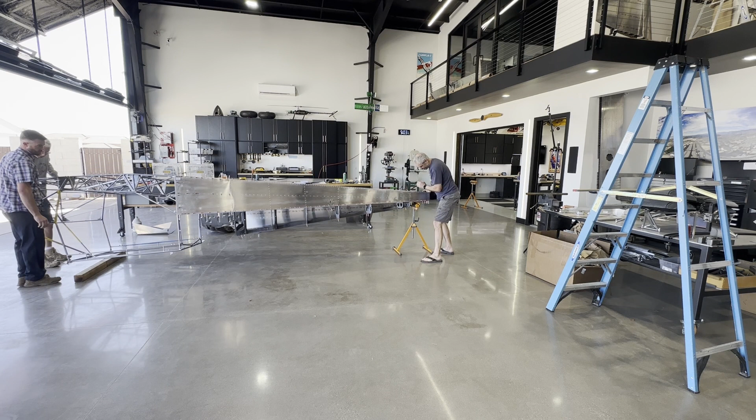I've got my bottom skin placed properly. It's centered left to right. I've drawn a mark on the underside of the skin 3/4 of an inch back from here. I've lined up those holes on those marks, so I'm set back the appropriate dimension. Like I say, it's centered.

At this point, I'm gonna go ahead and drill these holes for the tabs here. For that, I'm gonna clamp it first with some clamps, but then I'll come in here with my hole finder and get those along the front. I believe there's a tab or two - there's one right here as well, and one right here.

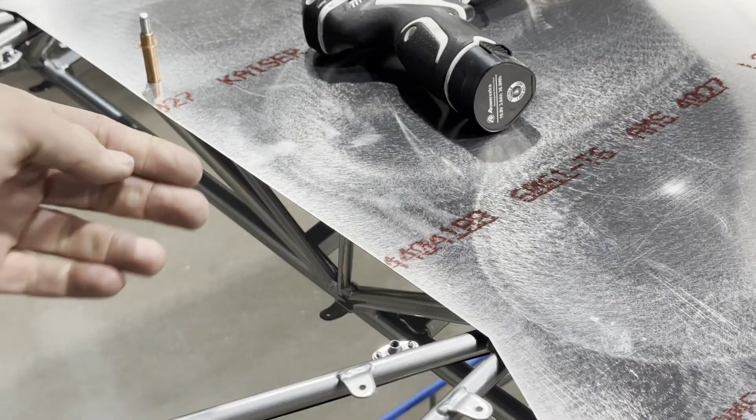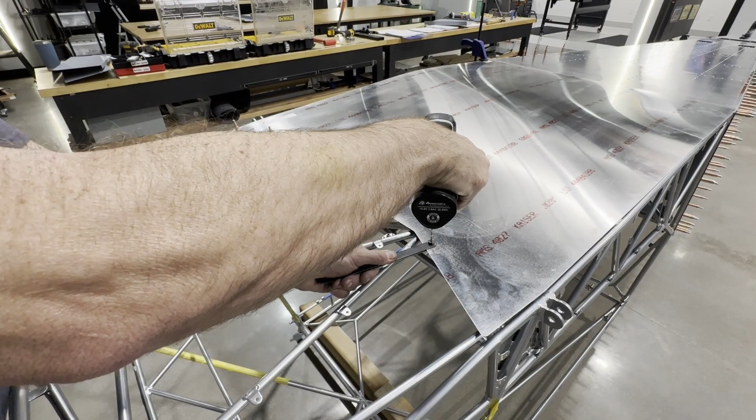Got all those on the front edge of the skin done. Now I'm gonna work my way back to the aft end. There are a couple rows here. I've got some tabs here, and some tabs here. So now for that, I will have to get up under there and match drill from the inside of the cage outward. But at least now this is locked into place, so that'll hold it, and I'll just get in there and do some drilling and work my way back.

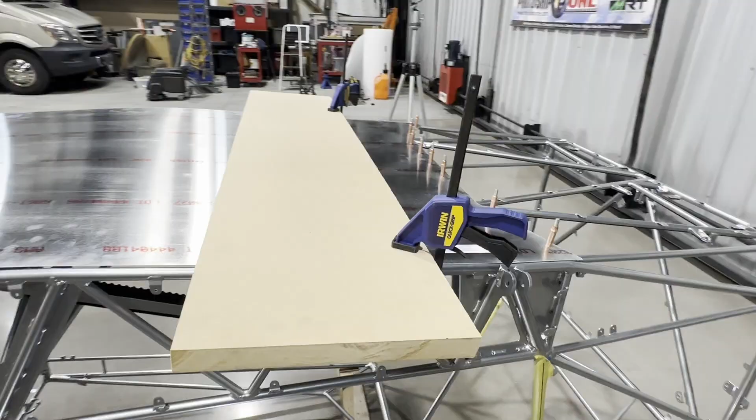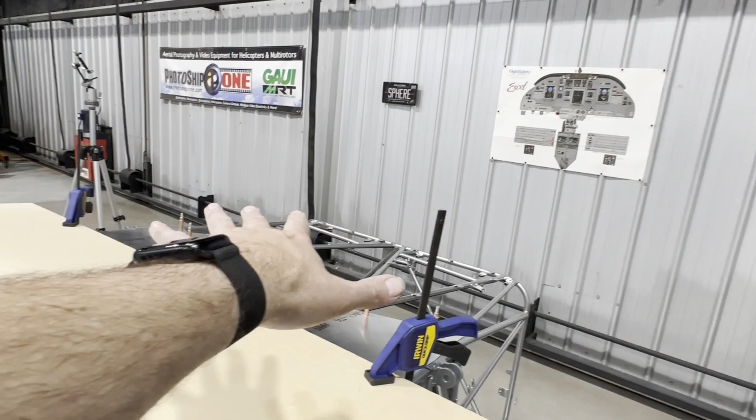As I was gonna go in there and start drilling, I realized I really need to put a backing on here, and of course, I'm by myself, so I can't reach around. So I just got a scrap of this 1-inch MDF, clamped it across here, and might put another clamp here and right there. It'll do two things - keep the skin nice and tight, and I clamped it down there, and it'll provide a backing for when I drill those holes.

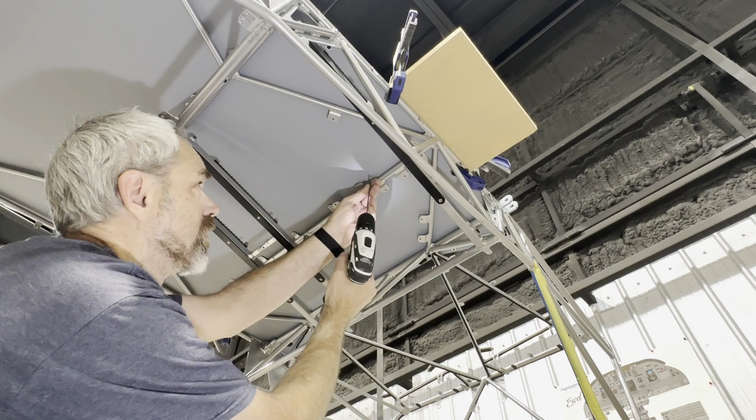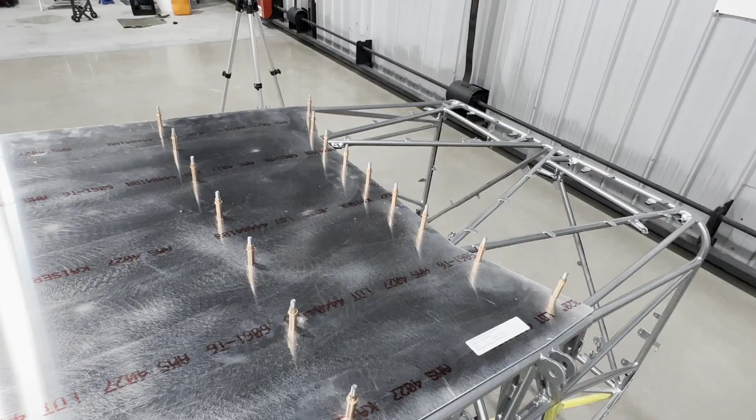That worked out great. I've got the board removed, I've clecoed, I've moved my board back to the next station that gets these tabs drilled. Got her clamped down, I'll get in there and drill that out.

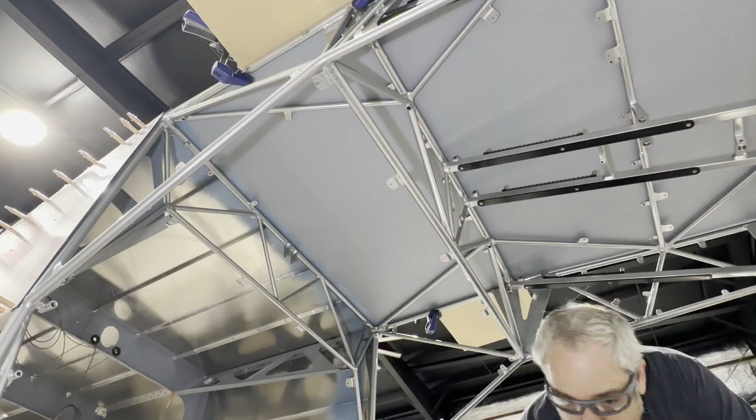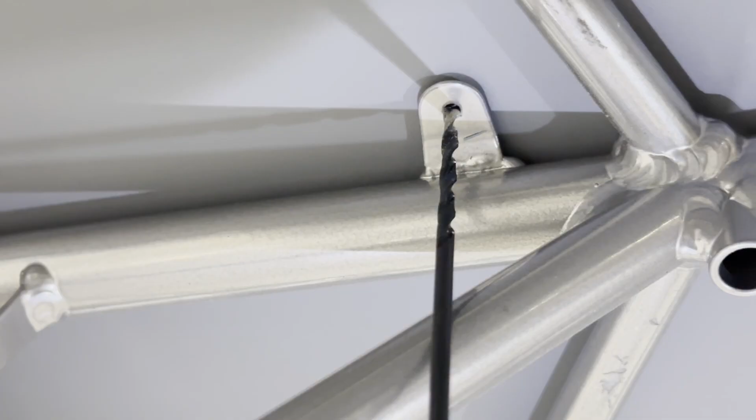Bottom skin is drilled and clecoed. Got all the tabs, worked out pretty good using that board. Working on the aft side skins at this point.

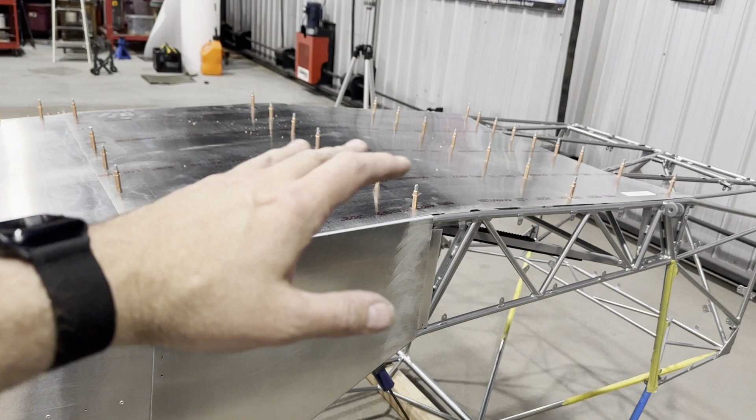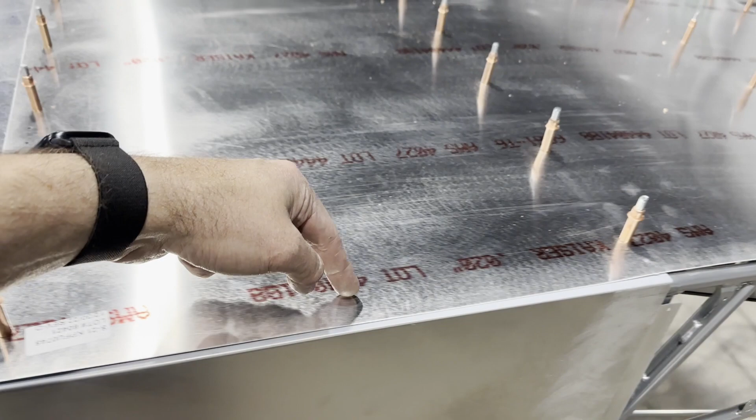The manual says once you get the belly skin drilled and clecoed to flip the fuselage over and do other things. But I thought it made sense to leave it upside down and work on these skins here, because I am gonna have to drill through here. I think it'd be easier to drill through here with this thing upside down and go through the belly skin into the side skin for the rivets that go there.

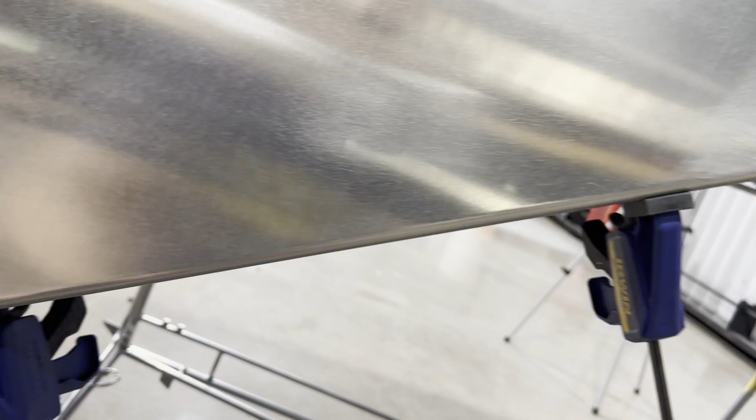So what I've done is I've got this in place. I've clamped it tight up against the tube at the front and rear so that everything is gonna be exactly where it needs to be. And I'll go in and match drill from the inside out. There's 3 tabs in there, and that's why they haven't drilled these holes here.

That's why there's gaps here. I'll match drill from the inside out these tabs, then cleco. Then I can come from out here and match drill from the outside in.

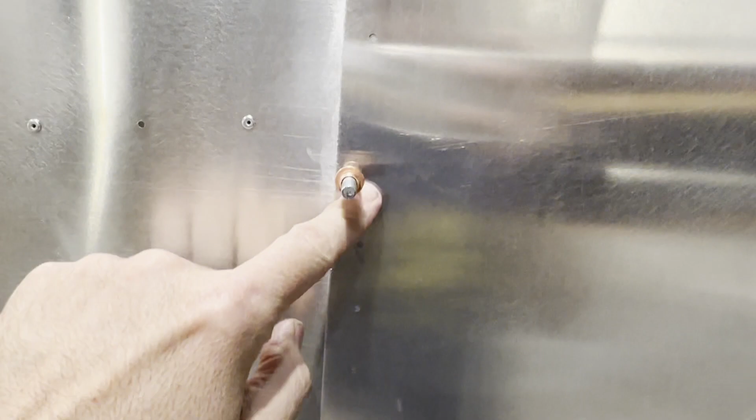Something I want to point out - I've got this skin fit here and I match drilled through, and something I noticed, the factory has pre-drilled holes, which I had showed earlier, and I was going to match drill in between those. Well, the match drilled holes are not in the same line as the pre-drilled holes. They're shifted back about 3/8 of an inch, 10 millimeters, maybe 12 millimeters.

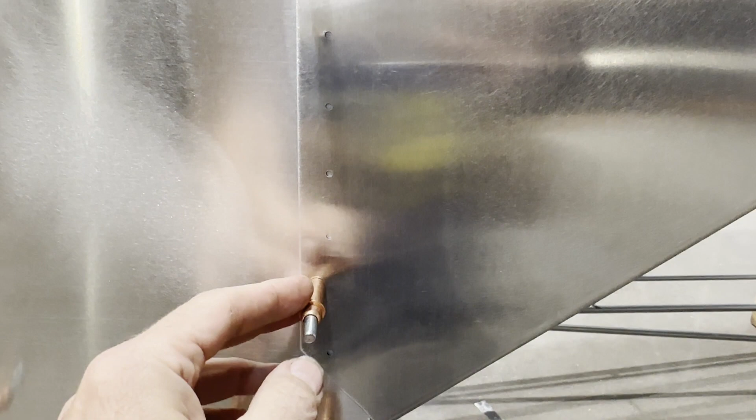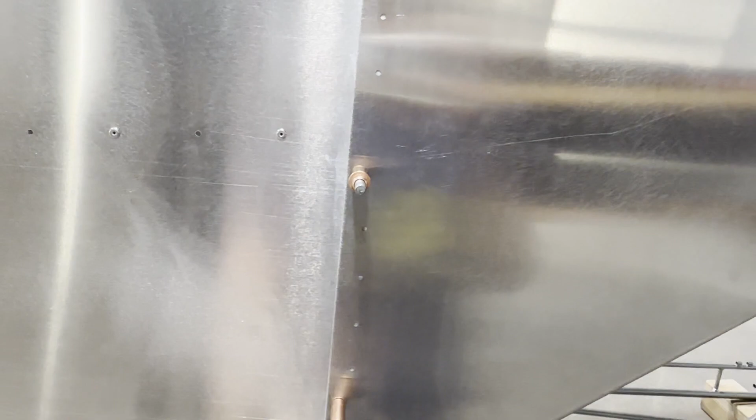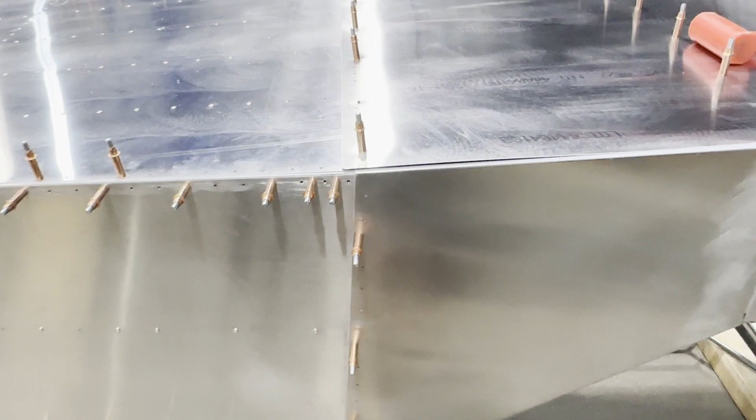At first I was concerned about that, so I reached out to the Facebook group and found that that seems to be typical. So don't be alarmed when you see that. It's unfortunate a little - I feel like a good change here for Rans would be to just move this row of holes back about 10 millimeters, and we'd have a little bit better chance of it lining up with these holes, because it's purely an aesthetic thing at this point. Structurally, there's no issue with that. It's just looks, and in the grand scheme of things, it's probably something that no one's ever going to see.

So just FYI, I did notice that, and if you ever are doing one and you get to this point, you'll probably notice the same.

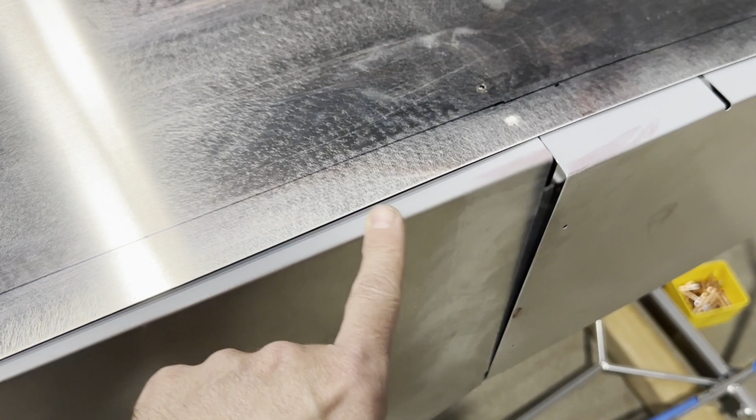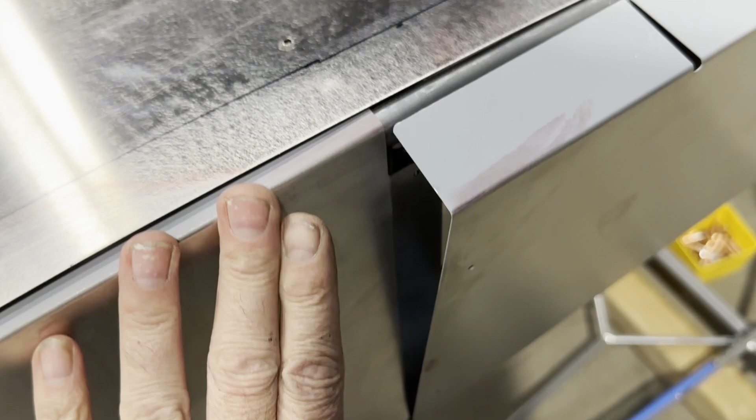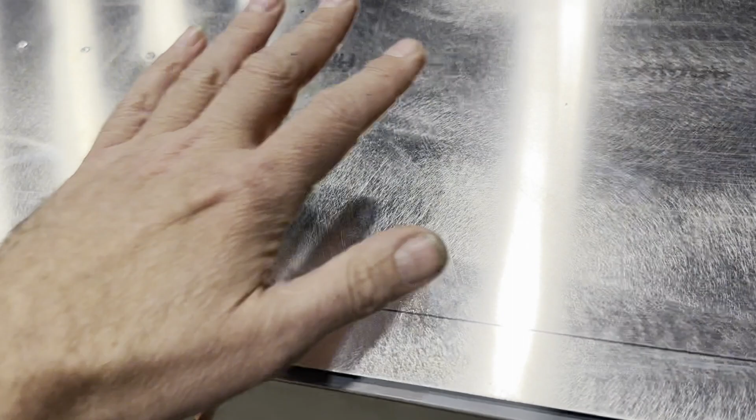Now what I'm going to do is get these holes drilled in here. They're going to go through the bottom skin and through these side skins. I've determined that these are 1.5 inches wide from the edge to the outside of this radius. I've pushed this tight up against the tube, and I've measured 1.5 inches all the way down, and struck a line. This lets me know on the outside here where this skin ends underneath, because I need to come in 3/10 of an inch. That's the edge clearance I need for the holes that are going to go here.

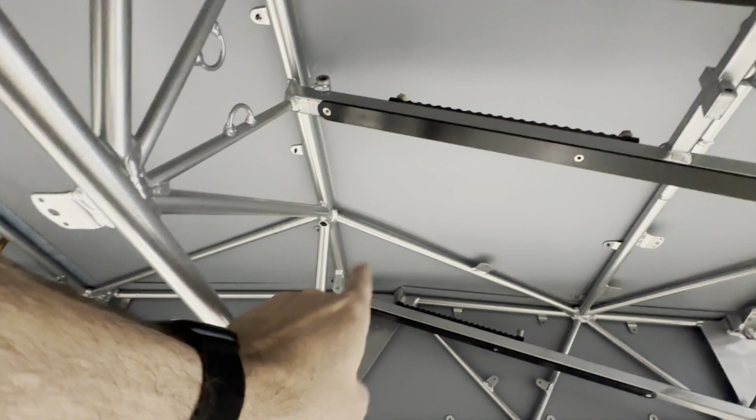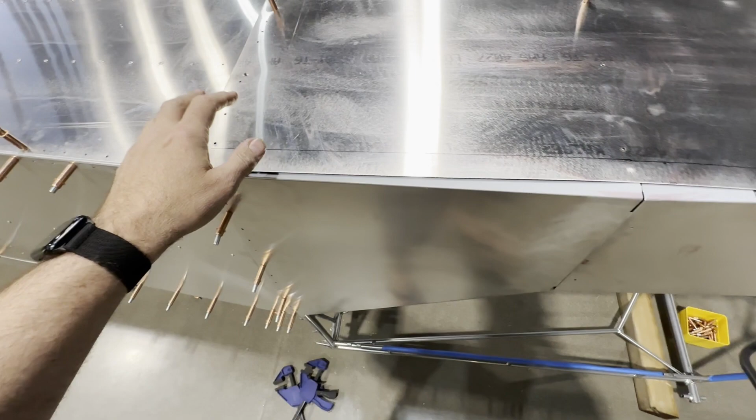And these holes are going to be on a 2-inch spacing all the way down. However, I do have some tubes in there that I need to be mindful of. As an example here, you can see where this tube connection is, that weldment with all of those connecting there, and so on. So I need to transfer where those exist on here, and then I can set my 2-inch spacing between.

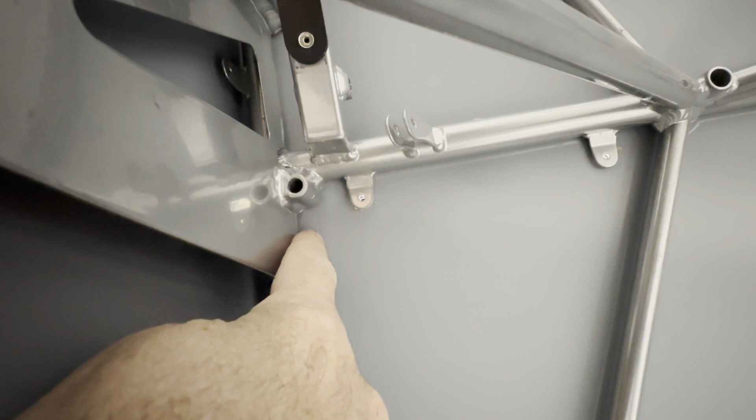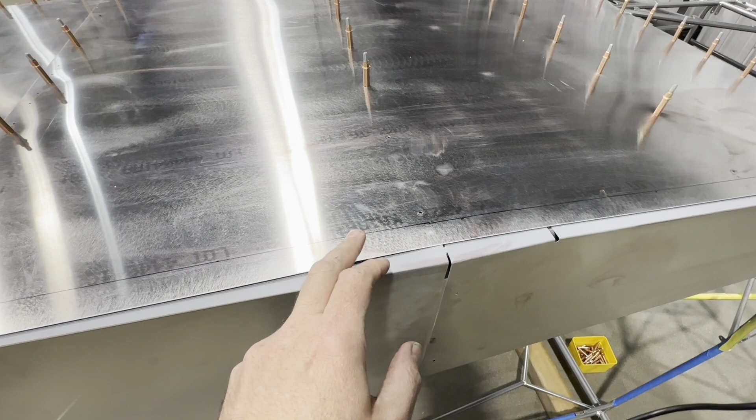I think the way I'm going to do that is come in from the inside with a long bit, and pop a hole right here where I've cleared this weldment. Then also pop a hole right here somewhere. Then I can come up here, I'll know where those two holes are, and use my rivet spacer and spread it out to give me a 2-inch spacing between those, or as close as I can get. Mark those holes, drill, and do the same thing coming up underneath here after that weldment, pop through, and so on, working my rivet spacer.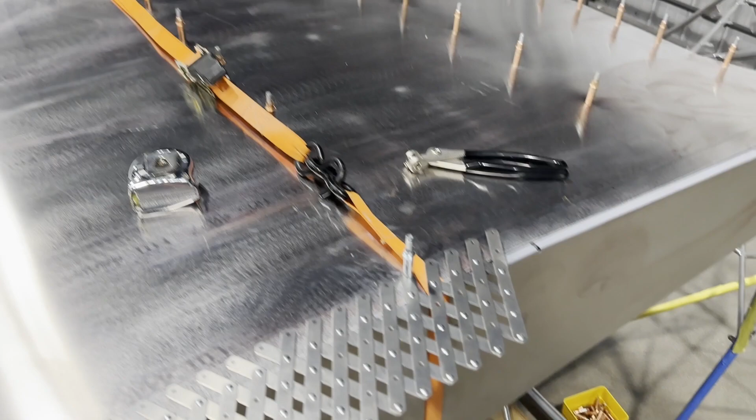That worked great. I popped that hole in from underneath. I ran a ratchet strap around it just to keep the skin tightly pulled up against the lower longeron tube, and set my rivet spacer up. If I go every other hole, it ends up being almost exactly 2 inches. So I'll go ahead and mark these holes, and just duplicate that same process for up here.

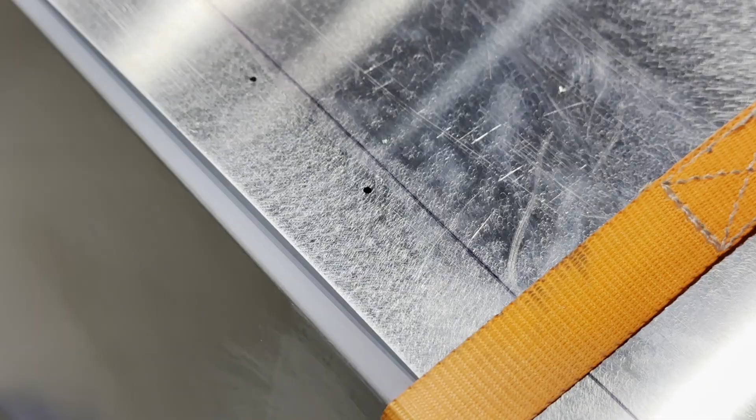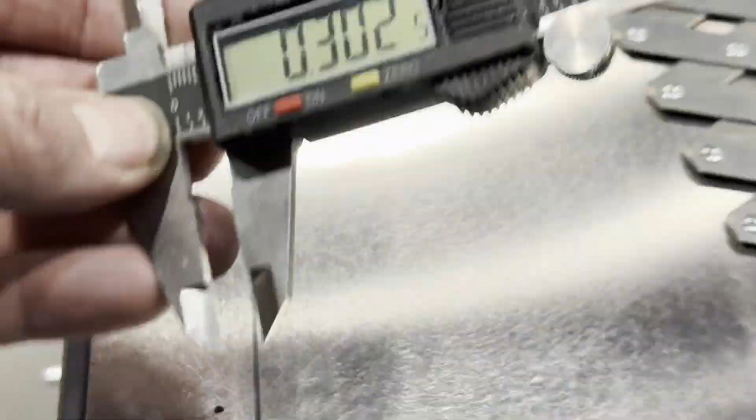And there we go, there's the holes. Perfect. And you can see I landed right on my 300 thousandths edge clearance all the way down. So good, I like it. Keep moving.

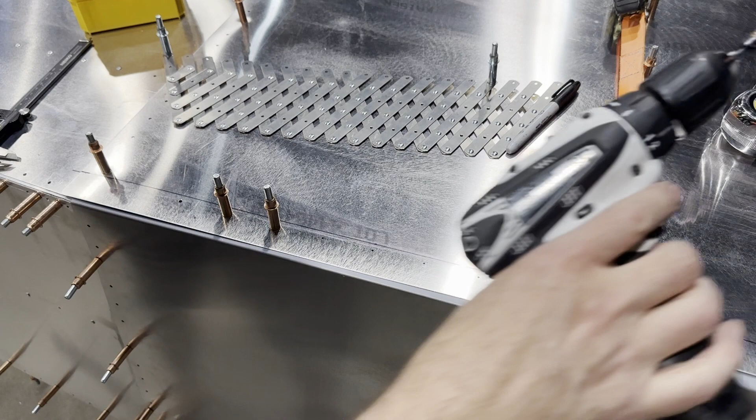I got everything marked out, and now I'm coming back in here and drilling on my marked holes. So I'm just going to give a good little push on the skin, make sure it's against the longeron nice and tightly, and I'll come in here and hit these holes.

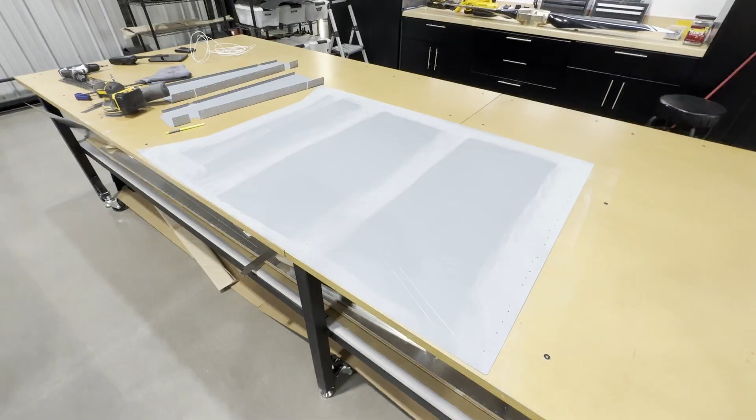Hopefully I've got the AC kicked on now. It's 97 degrees out here today, so it's heating up. My AC is kicked on, and it's pretty loud in here, but I'm wearing a microphone now, and hopefully we're not going to have too much background noise with the AC. I guess I won't know until I get into editing, but anyhow, here's the skin.

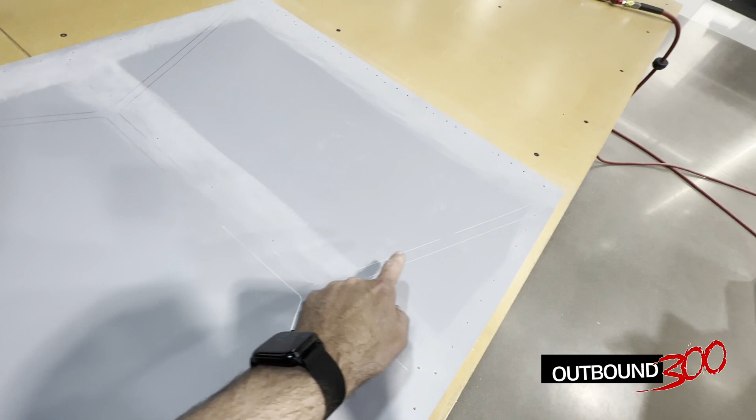I got the skin pulled off. You can see where I had marked it with a Sharpie, where the tubes were, so that I can place the stiffeners in here with some VHB tape.

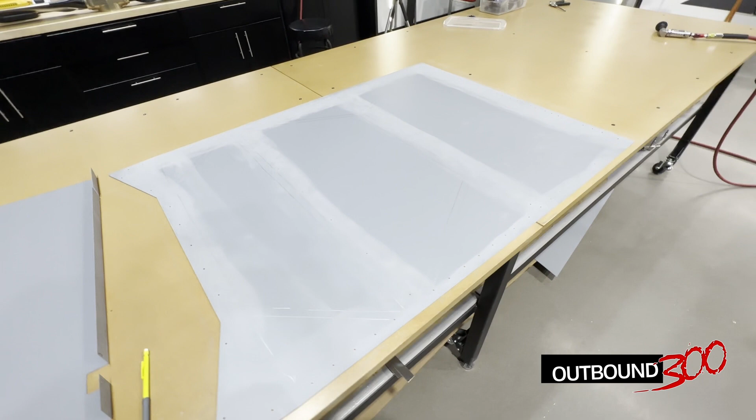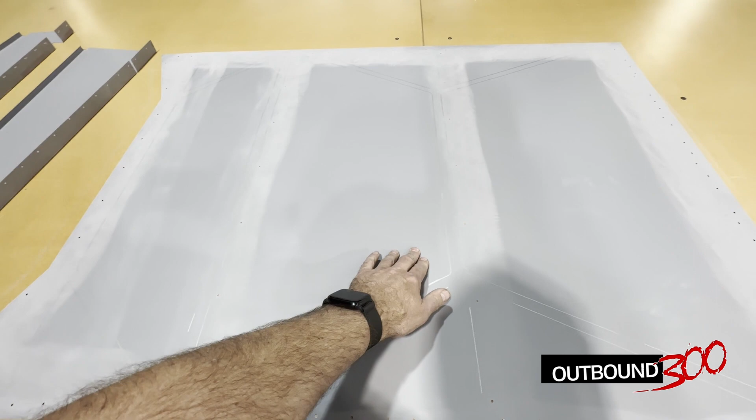Now, one thing, I kind of wish I would have done this a little bit differently in the order. I primed this before I put it on, not realizing I need to attach those stiffeners with VHB tape. But this is 2-part epoxy primer. I etched the sheet, sanded it, etched it, degreased it, sprayed the 2-part epoxy primer. It is bonded to this sheet, so I don't think it's going to be an issue, but I will try a test. I'll bond one on here and I'll see just how hard it is for me to try to pull off. Hopefully it's not too much of an issue. Worst case, I'll come in here and sand it down wherever I'm going to place these, stick them down, and then reprime after. So anyhow, got them all marked out.

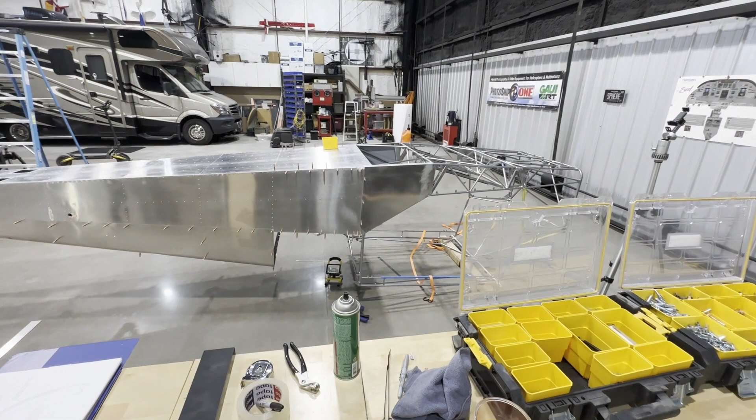I'll start working on getting those put in place. I've also got these side panels pulled off, and I've deburred the holes on both parts, and I still need to take those off and get those deburred. But little by little, one step at a time, I'm going to work on this right now.

Here's the figure, and here's the schedule for what I need to cut these at. This is the stock here. These were all wrapped up in one of the paper wrappings with the kit.

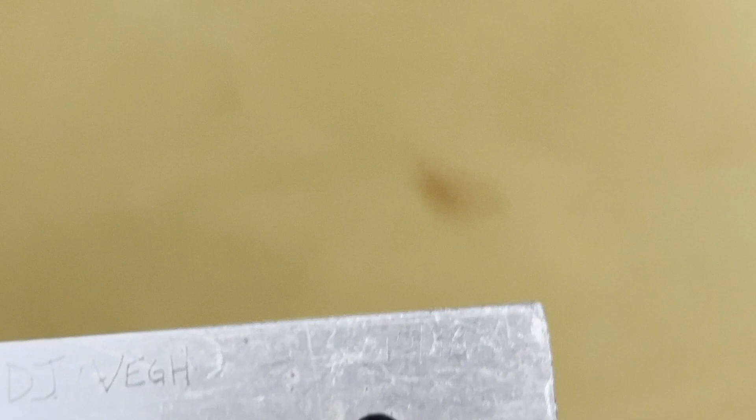Here's something funny. This is my ruler that I'm using to measure these out, and I've had this. I engraved it when I bought it, I guess. I don't really remember doing this, but I put my name on it. October 1998. I've had this for that long. What is that, 25 years? Is that right? Yeah. Crazy.

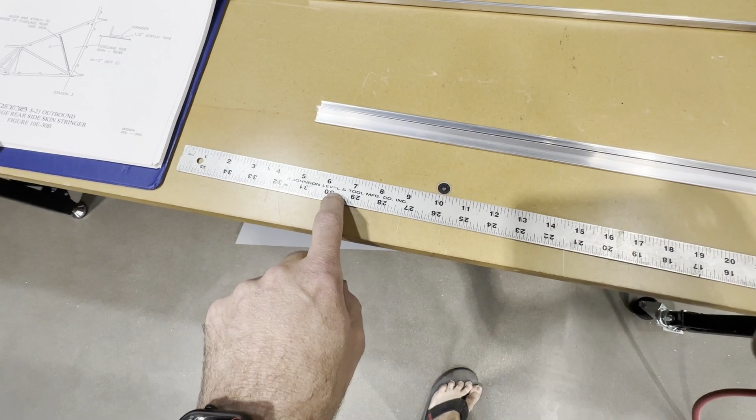I was doing a lot of RC models back then, and I probably bought it for that, but hey, still putting it to good use. And Johnson Level and Tool, that's made in America right there. Made in the USA. So there we go. I just thought that was kind of neat.

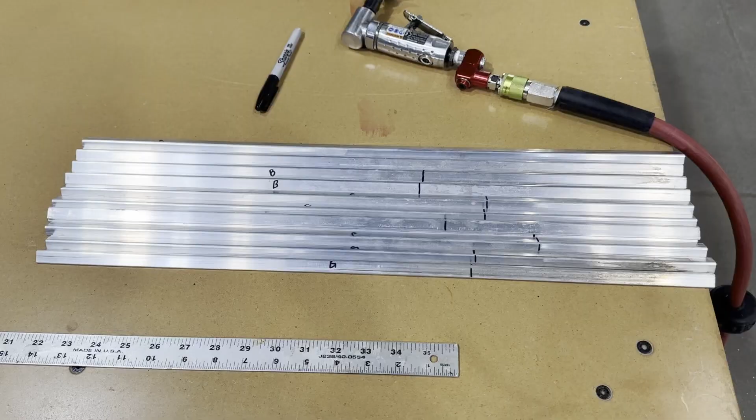Got these all marked out. Take them over to my bandsaw now and get them cut.

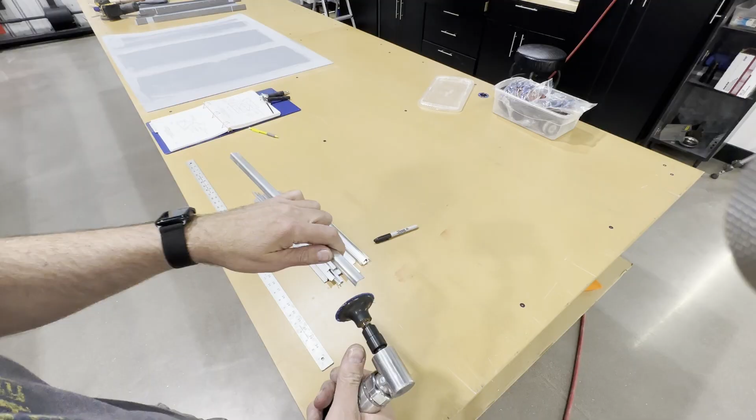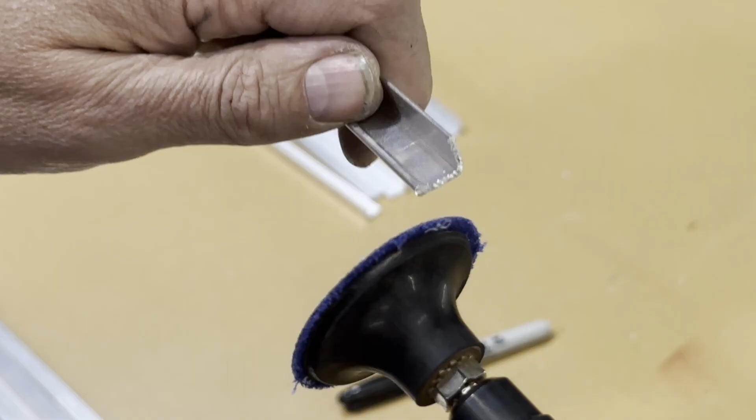All right, I've got my VHB tape applied to this stiffener here. This is letter A, this goes up front. Turns out that the line I want to put it on falls between a couple rivets here. You can't see one, it's just off frame, but there's one in the skin right there, and there's one in the center right here. So I just laid my ruler out there as a guide, and I'm going to peel off the backing and kind of eyeball this centered between where the tubes go.

Like so. Press it down real good. I'm curious to see how well it adheres to my primed surface. I did wipe it down with some brake cleaner and got it free of grease or oils. I did the same thing with the stiffener piece. Get it a good bond here.

Yeah, I think it's just as strong as if it was aluminum on aluminum. That is bonded. That's incredible. Yeah, I feel comfortable with continuing on.

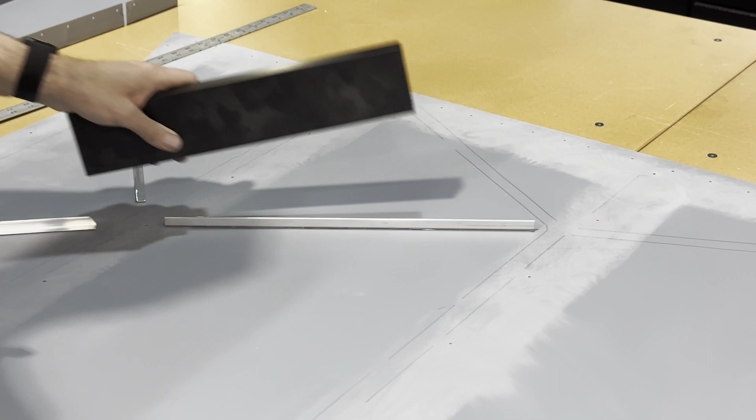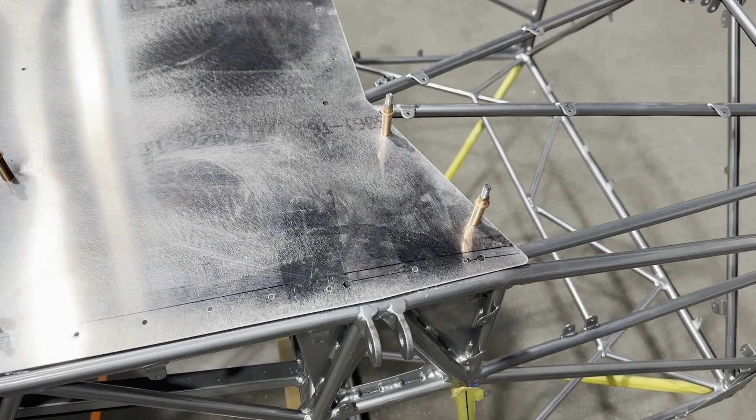I noticed I had forgot to drill the holes for my landing gear when I had the skin on before. I noticed it when I was putting the strips on, the support strips. So I got the skin back on, and I came up through the bottom. I pilot drilled it the best I could with a 1/4 inch centered. And I'm gonna open it up now to the correct size with a step drill.

That's pretty good. Centered right up.

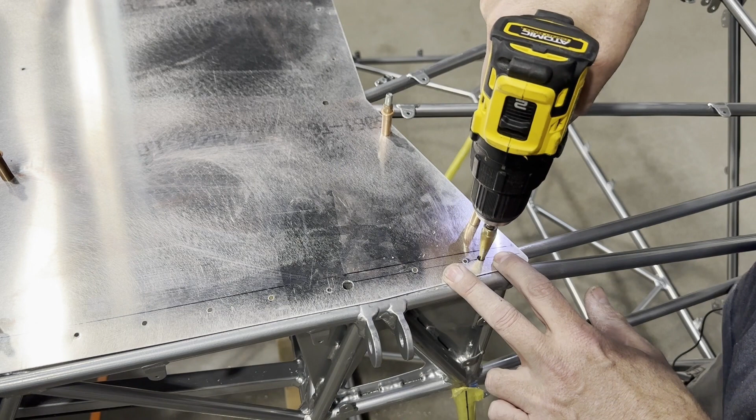What's nice about a step drill is if you pilot it and you're going into a hole, like I'm going into this tube, it kind of acts like an end mill because it's got 2 flutes, and it'll ride up against the steel there and just work its way and center it down. Because I know I wasn't perfectly centered, but the holes now are dead on, so step drills for the win.

I'm gonna match drill the side skin, the aft part of it here. I've got it clecoed through the inside, through the support strip, through the tabs, and now I'm gonna catch all these holes remaining.

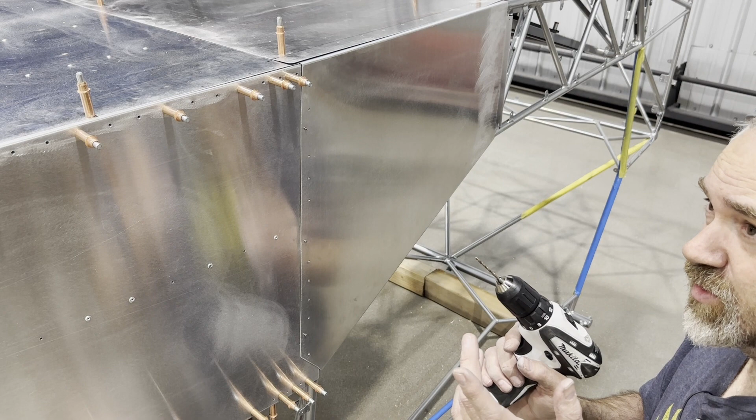Also, what I've been doing when I'm match drilling through existing number 30 holes, I just started doing this. I wish I would have done it earlier. I'm using a 3mm drill bit, which is undersized by about, I think, 10 thousandths or so. What's nice about that is I'm not walking around and opening up the part that I'm match drilling through. Then later I'll ream them to 30 when it comes time for either assembly, or I might ream them and then deburr them separately. This way I'm not opening up and creating a bigger hole on the skin that I'm going through. It seems to work pretty good.

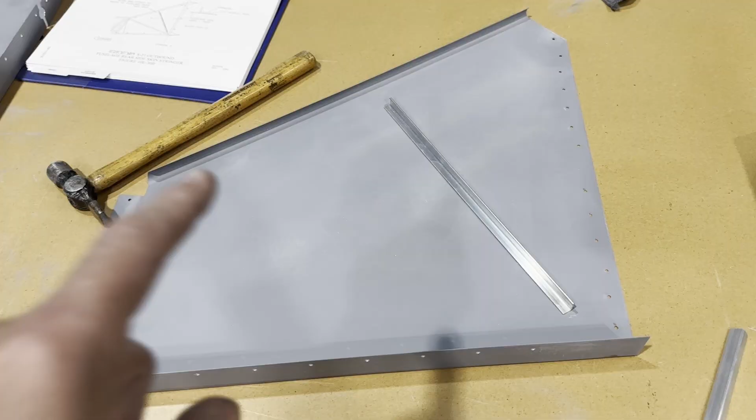The aft side skins also get some of these supports as well, using the VHB tape. You can take this opportunity while the belly skin is off to put these nut plates on at these locations here, right there. There's one here, got a couple here, and I think that's it. There's, I believe, 10 of them. Now's a good time to get that done.

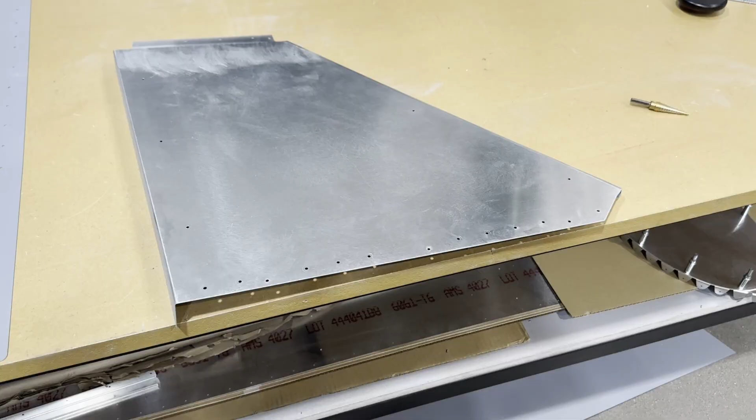I'm gonna slightly break the edges on some of these panels here. This one, I already did these here. You can see there's a slight bend there on the aft edge, just where it meets, where it goes over the aft side skin. So what I want to do now is take, you can see I did it on this one as well.

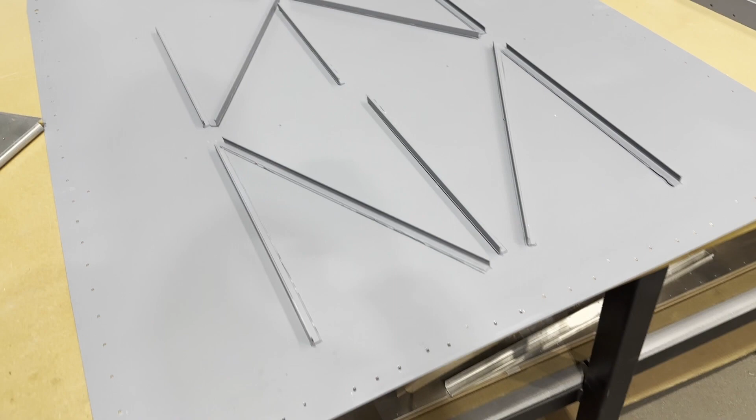Take this skin, put a little bit of a bend in it, and then I also want to put a bend on the aft edge of the bottom skin, and probably the sides as well. I noticed that when I clecoed these on, it tended to lift up a little bit, especially where it takes a curve down towards the front. So I think that slightly breaking that edge will help keep a tight seam where the panels line up or where they join. I'll do that now on this one, and then I'll get to this one.

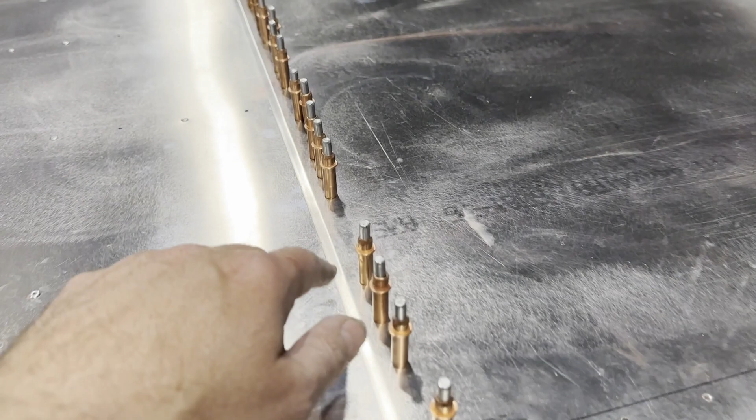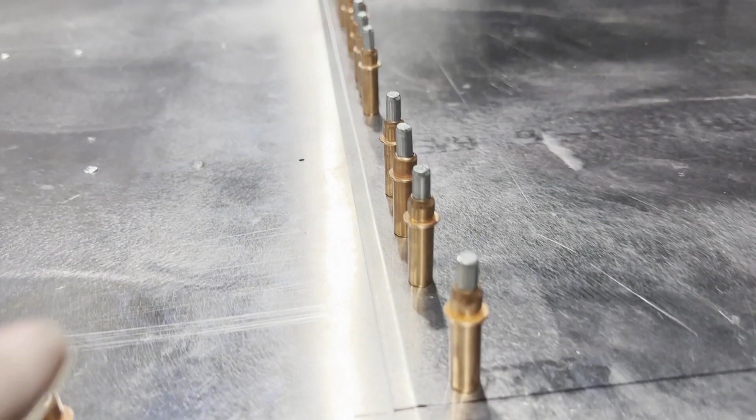Test fit the bottom skin after I put the bend in it. I put a pretty sharp bend in this one, only because the edge distance between the rivets and the end of the panel is a little bit larger than what it would normally be. It's an inch on some rivet spacings and maybe 3/4 inch on the ones that are a little more forward. That's quite a bit of distance for the panel. So I put a pretty sharp one in there, sharper than I would normally do, but it actually looks really good. You can see it holds tight all the way down.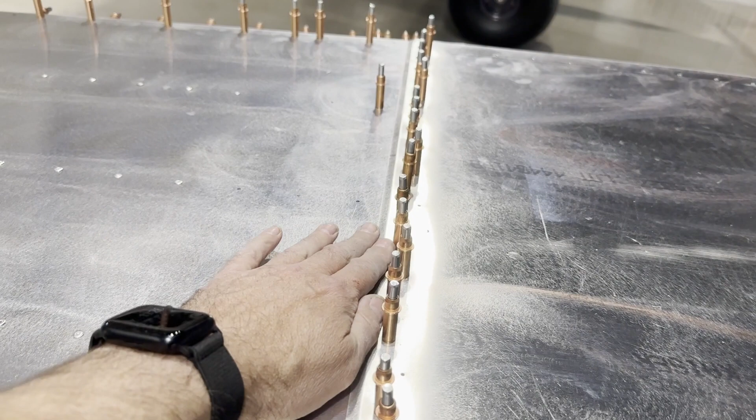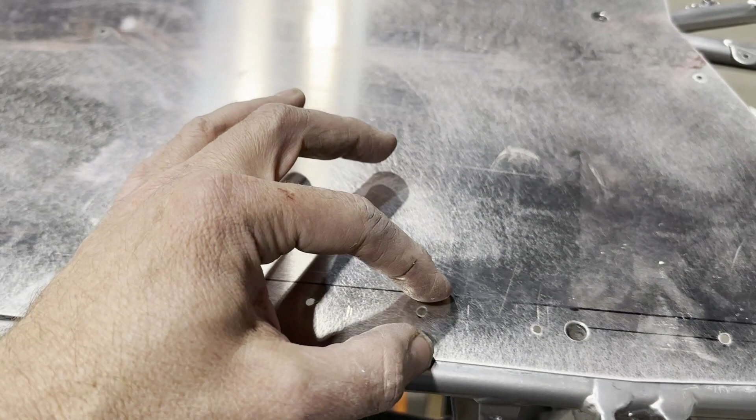It just creates a very nice finished look. So I'm glad I was gonna do that anyway, but then I was thinking, I really need to put an extra bend on that just because it's such a wide distance. I may consider going maybe not quite as aggressive as I did on the aft edge, but I might get a little more aggressive than normal on the sides for the same reason. There's quite a bit of distance here, and I want to make sure that this bottom skin fits tightly to these side skins. So I think I'll go into it a little at a time. I'll do an edge, come over here and test fit, put the side skins on, test fit it, cleco it, kind of see how it looks. If I need a little more, I'll do that. You can always add a little more in, but you can't really take it out once you've put it in.

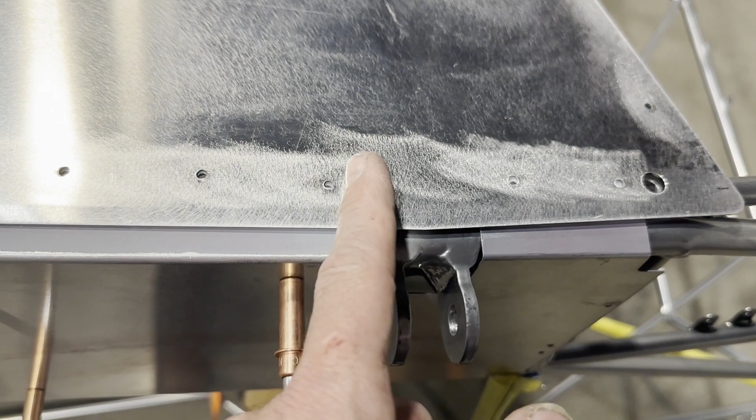I need to dimple the bottom skin at these hole locations here for the landing gear. I also need to dimple this skin underneath, and then a flush rivet's gonna go in here. The manual only calls for these two here. I think I'm gonna do this one too, because when I drilled these, my spacing was such that this ended up quite close to this, and I don't know if the landing gear is gonna maybe interfere with that rivet. So I'll go ahead and dimple and countersink, or flush rivet, that one as well.

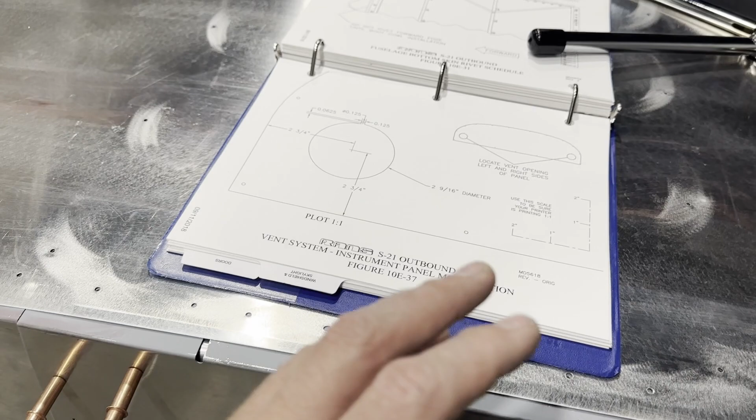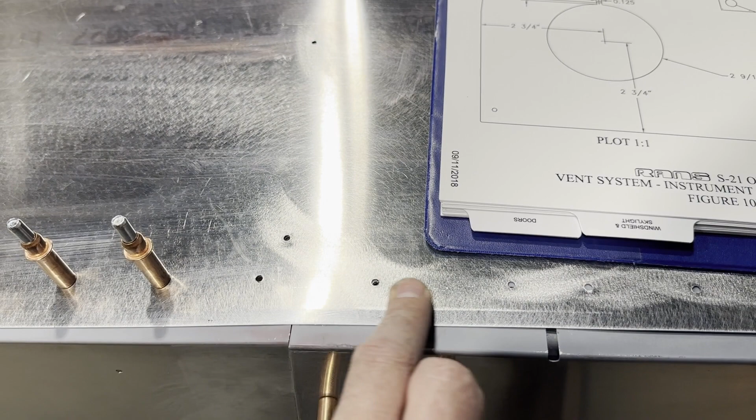I am doing a tail dragger. However, I also want to leave the airplane available for, in the future, a trike. That's why I bought the trike engine mount, just for resale value later, or maybe I get a crazy idea and want to run trike for a while, whatever. That being the case, now is the time to run these countersunk also. So I need to dimple these skins below it, both sides, and prepare it in case I want to run a trike, and then certainly for tail dragger for now, those are going to have to be done.

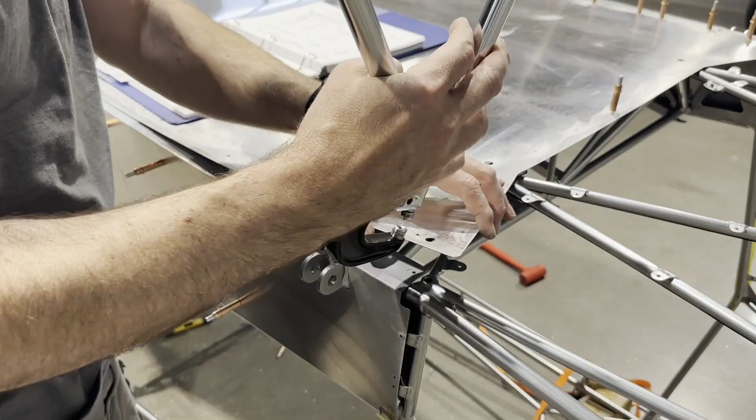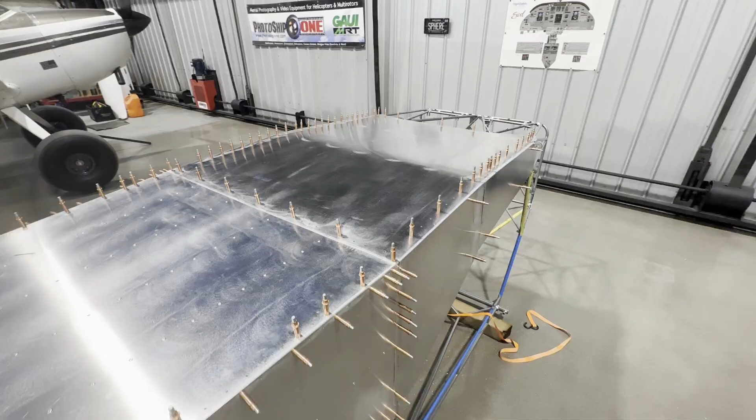I believe the time has come to rivet the floor skin on, the bottom skin, and these side skins. I've been going round and round trying to make sure there isn't anything I'm forgetting. Don't think there is. It's tough because once you get something riveted and you realize, oh crap, I shouldn't have done that, it's a lot harder to fix later. But I think it's ready, so I'm just gonna suck it up and do it, and I don't think I'll have any problems.

I'm gonna start out by hitting the CCPQ 42s on the back skin here, bottom skin at the back where the tabs are, which is where I have clecos right now. I'll hit those, then I'll look at the schedule and see what the others are. I'm gonna start at the back and rivet my way forward, and do the same thing on the side skins, starting back here and moving my way forward.